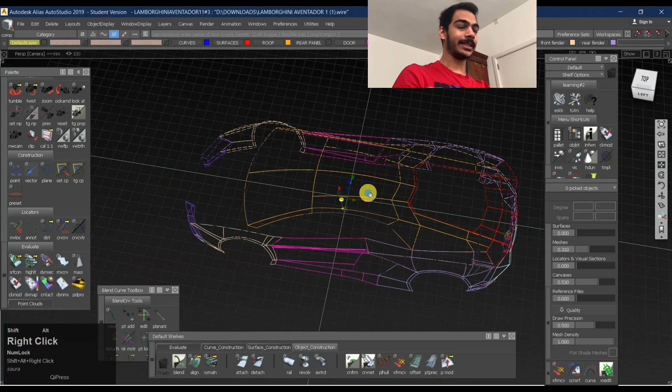And yeah, it's been a long time again, and it takes some time for me to set up everything. I was also having a lot of health issues recently, so that is why I wasn't able to upload any videos. But yeah, now we are back and let's see.

So I thought maybe before continuing the project we are working on, like making the second part of it, I'll take one of the doubts I had from one of my friends. He texted me on Instagram and let me know that he had started with a Lamborghini, which is a pretty good choice if you are starting out with an automotive project. If you take a look at his model over here, it's not a bad start. For someone who is doing it for the first time, it's not a bad start, right?

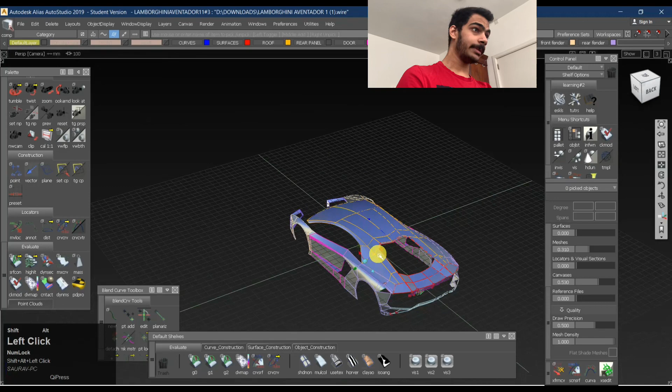You see, he has gotten all the basic shapes right, and he has put them wherever the blueprints are asking him to. If you see over here, he has tried to keep the surfaces as clean as possible. This surface looks pretty good to me. This surface looks pretty good to me as well. Using 4x3 and stuff like that, it's pretty good. The main issues I found here were, if you see over here, on the wheel arch.

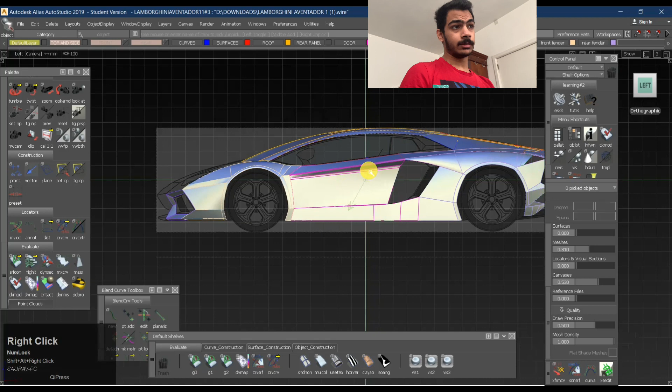Okay, before that we'll also talk about the first thing you need to do when you are starting out with an automotive project. If you see over here, the center of this grid needs to have the wheel on the center of the axis. The main reason is that all cars have different dimensions. There might be a sedan, a hatchback and stuff like that, so they have different sizes. Some might be quite big, some might be very small, like SUVs or sports cars or whatever.

The wheels are of different sizes, and when you start modeling something, you need to have something pretty precise, something which is constant for all of them. Despite having a different size, they need to have something which keeps them similar in one aspect, especially when you are starting to model. I've worked with quite a lot of transport designers who are pretty good at what they do, and they have told me that most of the time when you are modeling something, it's all on the wheels, right? It's all on the wheel.

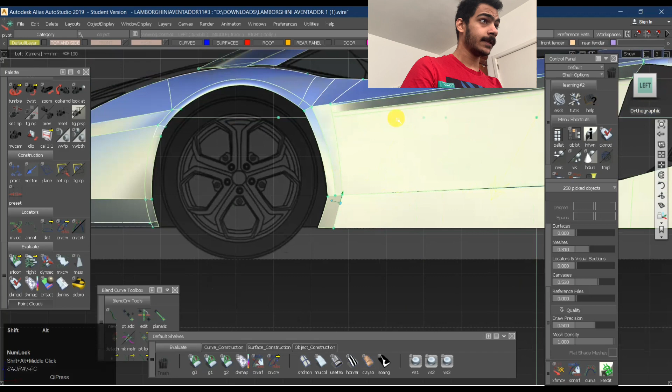The wheelbase over here is usually measured with the number of wheels, right? To give you a small example, I take a circle, place it over here and move it. This is just to show you what is wrong in the model. For now, the shapes look pretty okay. For a concept model, it looks pretty okay, what he has tried to achieve. If you take a look at this, approximately this is the wheel.

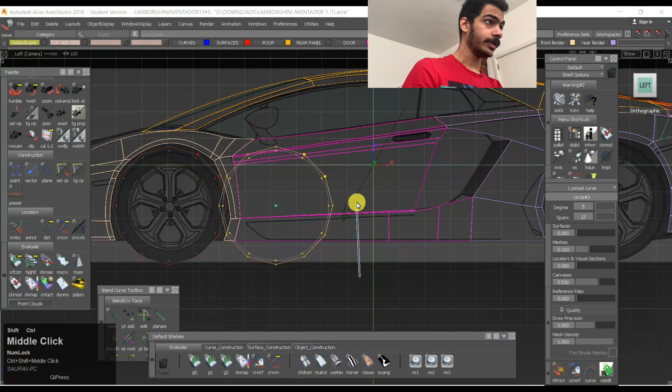I'll just duplicate this one over here, somewhat like this. We go around like this, and we go around like this. And you see there is approximately a three-circle, like a three-wheel wheelbase. So all these measurements are kind of precise, and maybe somewhat over here as well. It's almost like this, because obviously I have messed up the original, but most of the time it's something you need to take care of: there is about three wheels' distance between the wheels on the wheelbase.

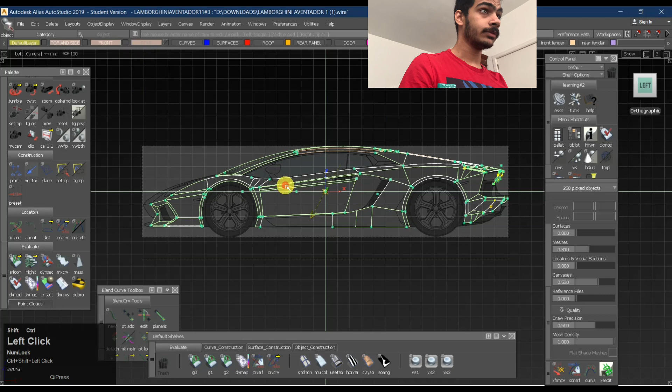And if you take a look at this, the first thing that we are going to do is take all these things. We'll first unite their pivot points. So, uniting their pivot points.

Okay, and delete the construction history because that is messing up with our product here and it's taking some time.

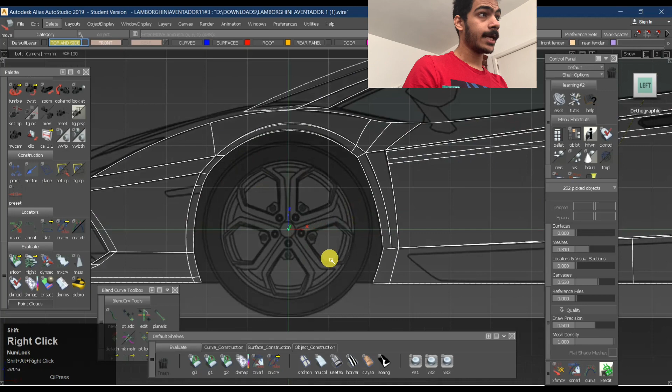Now, let's move the pivot point to the center of the wheel, and move it to the center of the grid. Now we have the front wheel at the center of the axis.

Now what this does is make it easier for us to understand: from here on the positive x-axis we'll have three wheels. So it becomes easier for us to start measuring things out. That's the main thing.

Now, that is the main thing we need to keep in mind - keeping it on the positive side of the axis. Most clay modelers also do the same thing. When they are clay modeling something, they start measuring it out from here. If they want the center from here, they'll start modeling it out from here. So that's the main reason - the axis is the most important part where you start from.

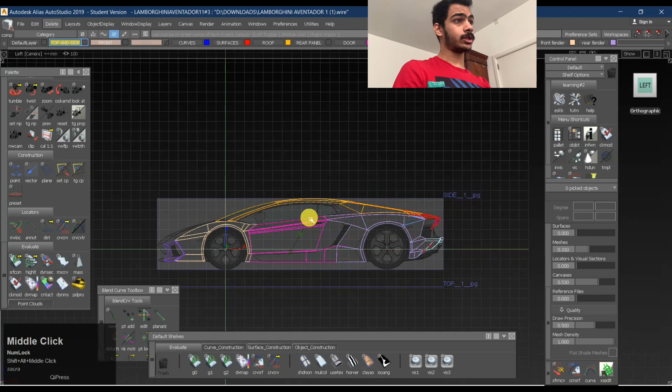Then comes the scale. I don't know what scale he has used right now, but you need to take a look at the scale. You need to have a proper measurement of what the scaling is and how big your car fits in.

Because obviously what happens is when you start with the class A model, most of the time you'll get the clay model and you'll have to just lay the surfaces on top of it. But it is usually recommended that you play with the scale.

Because maybe you work on some higher tolerances or lower tolerances, depending on your scale, the tolerances are going to change eventually. So that's one thing you need to keep in mind as well - keeping the scale precise is one of the most important things.

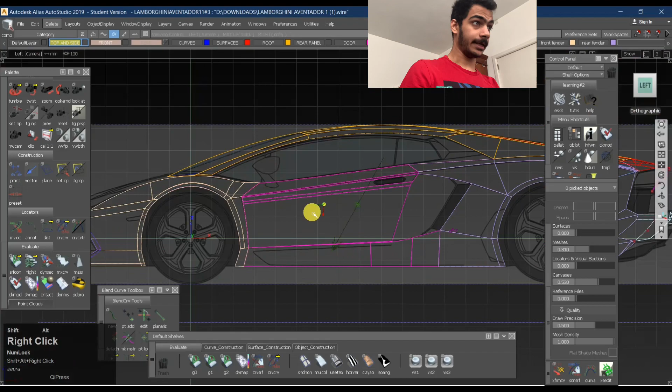So the other thing I saw here was the wheel arch construction. Now I feel he might have first constructed these surfaces, the ones I'm highlighting, and then created the wheel arch over here.

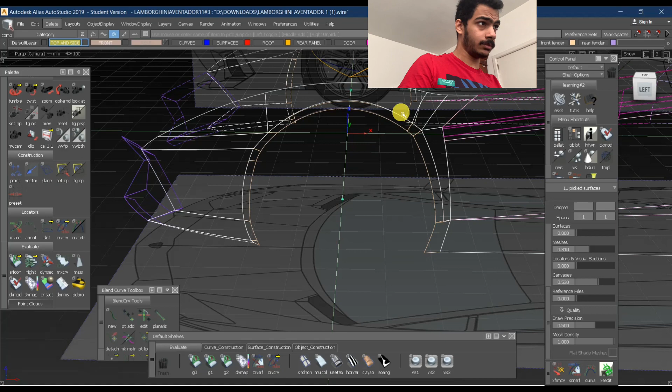Which I would say is not good - it's like a wrong thing to do. First you need to create the wheel arch, and the best thing about this is he has understood that the wheel arch goes in - there's a wheel that shows up and the wheel arch goes a bit in.

So there's a small trick I was taught during one of my lessons. What you do is take a surface, pick a plane, take a surface here, scale it up. There are different methods as well - like you can just skin it, skin a circle.

That's also pretty okay, but since we need something easier for us to change and play with a bit as well - if you see here, it's not a perfect circle for him, it's breaking at a lot of points, and we need a perfect circular wheel arch. So that's what we'll have to take a look at.

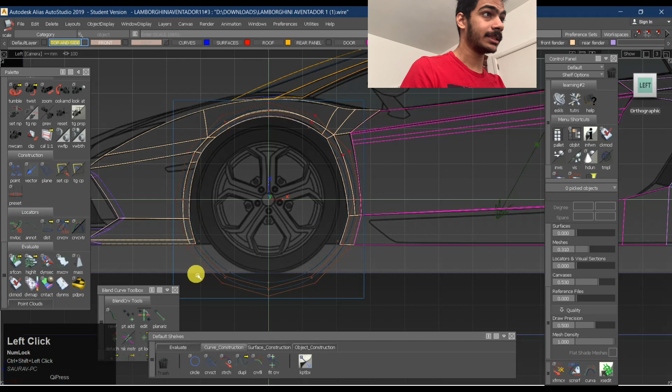Now, I'm just doing it quickly because we don't want to waste a lot of time on this. So this is what we want - you'll just connect a curve if you want it a bit straight. Now I'll try to shift these in a bit, play with this and push them inside, because we want them to be like something like this, and just project the circles over here.

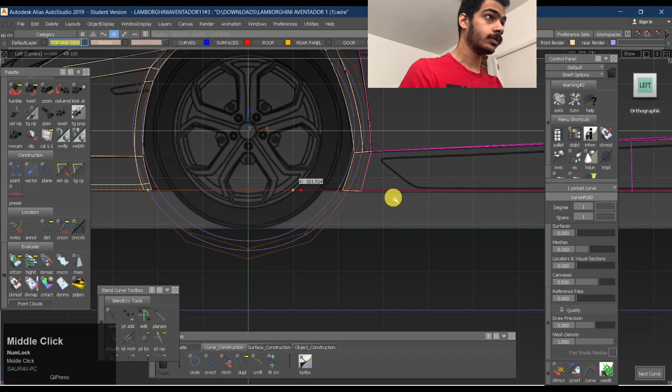And then we'll just trim them out. Keep it and trim it, right? Now we have the history, we have the surfaces over here. We'll just make another curve over here and project it again, and discard this part, right? And now we have a wheel arch which is completely, if you see, we just made this in a couple of minutes, right? We just made it in a couple of minutes and we have something which looks much better, right?

We have a flat plane over here which was just used to create a wheel arch. That's how easy it is. And from that, if you want, you can just maybe play with this. This is my new wheel arch which I have created. So I'll just drag it a bit over here.

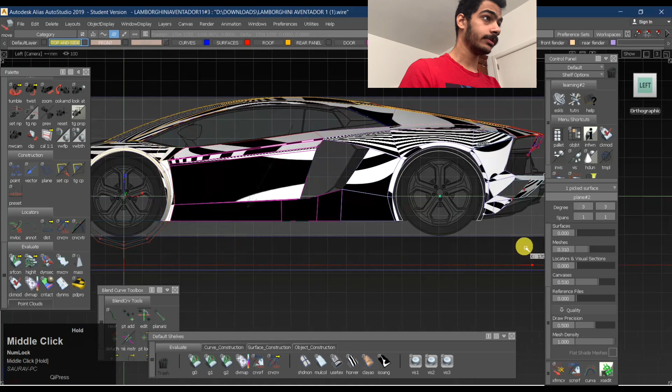Just to show you how it needs to be done, I'll just Control C, Control V. I'll move this over here, maybe approximately somewhere over here where I feel it's pretty okay. And...

If I have a surface in between, this is how usually I like to do it. But if I have a plane in between, I'll just make a non-proportional plane. Maybe make a non-proportional plane again, move it a bit ahead over here like this. And okay, where's my plane? It's somewhere over here. This is how usually I work with automotive stuff, right?

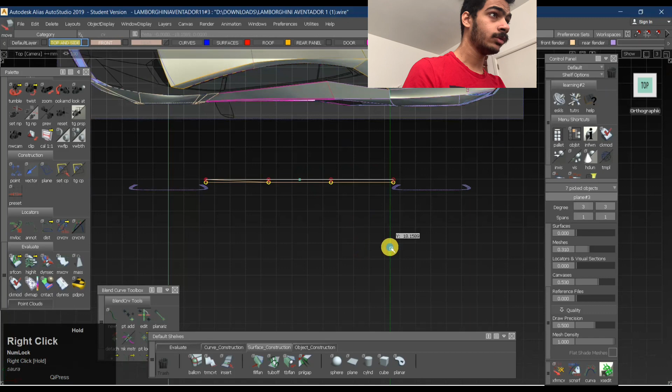So something like this. Now we have a little bit of curvature at the center, so I'll just pick these 2 points over here and bring them a bit out, right? Okay, we have forgotten 1 point over here. And we'll just bring this a bit out, right? So that we have something which is a bit better.

Something like this. And obviously this is not subjected to only this car, right? Your working might differ depending on the car you want to achieve. But this is majorly how you can work around with wheel arch and creating a perfect, good looking wheel arch, right?

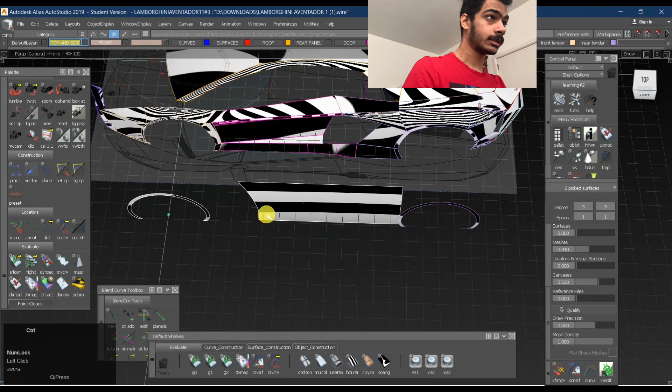So if you just scale it maybe, and just scale it so that you have somewhere from here maybe, and project it, and then trim it. Oh, we'll just keep that part because we need that. And over here we'll just hide and just freeform blend between these two.

Okay, I don't know what the issue is. Maybe I'll just untrim and trim it again. Yeah, maybe trimming it again might work. No. What we'll do is we'll try to detach it maybe. Okay, yeah, because it's a plane, obviously. That's not going to work, right?

So we'll just freeform blend it. But I doubt if it's gonna work. So maybe a square would also work, right?

And we'll keep it 3 by 3 degrees because we just need G2 from one side, right? And object align G2 from here, right? And G2 from here. But now we know that, okay, maybe we cannot do G2 because it's following this path. So we'll use vector, right? And vector goes normally with it. So we have something like this, right?

And then we'll just trim this part again. We don't need this, and then just square it. Oh, okay. Maybe there's another issue over here.

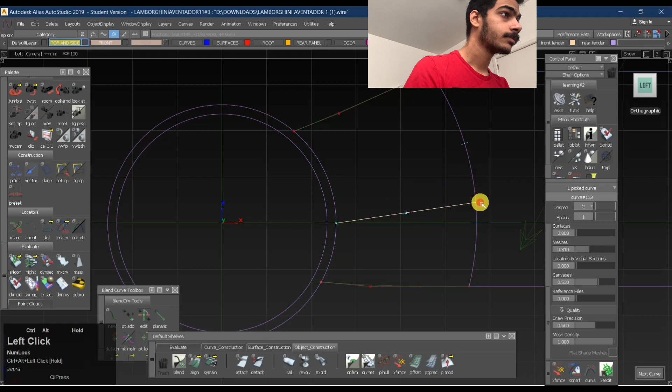So obviously most of the time when I am doing it, it's okay to use a plane. I usually go around and play with the skin. You can also skin it, which will be much easier if you want to achieve something like this. But this has a history, right? So you can just move around and play with the plane and stuff like that. With the curve, it becomes a bit tricky.

So that's also one more thing which you need to keep in mind, right? But this is, again, there are multiple solutions to this. However you want and however you can get your surfaces clean. Okay, so we have something, there's an issue over here maybe.

What we can do is, if we see over here, maybe there's a point where our circle is joining, right? So maybe we can just rotate it, not like this, maybe somewhere over like this, right? That we have something like this.

And then maybe around 90 degrees, yeah, that would work. And then trim it. Yeah, now I think it should work.

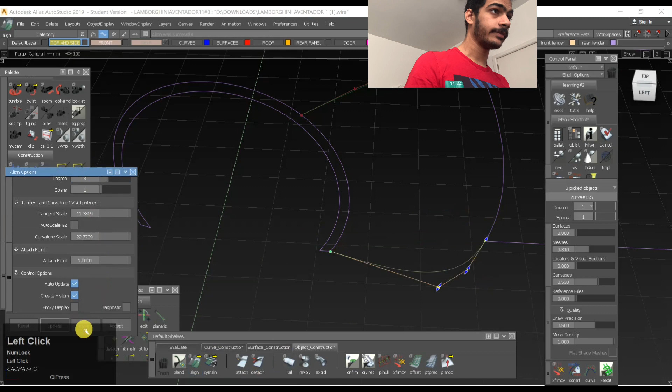Maybe, where's revert? We'll just revert this. Okay, we have revert over here. And we'll align it over here, right? Now we'll just square this thing.

1, 2, 3. Okay, maybe there's align, now we'll have it, right?

Yeah, so these are some of the changes you need to do. Again, I don't know what happened over here. Maybe we again, this is one thing which happened.

Now I'm just going to attach it for now. I won't be paying a lot of attention to this. I'll just be attaching this and I'll just square it around, right? 2, 3 and 4. These are some of the things which create some of the problems in Alias as well. So yeah.

And maybe 4 degrees might work, 5 and 8, but we don't need 8, right? What we can do is we can create a 3 by 5 kind of a surface. We can just detach it in the center, and then realign it.

We can detach it in the center, we can realign it, maybe G2 over here. We'll see the continuity check, edge align. We'll keep the skew over here. We'll try to keep it positional align, and that positional influence is okay. With G0 over here, it's perfect.

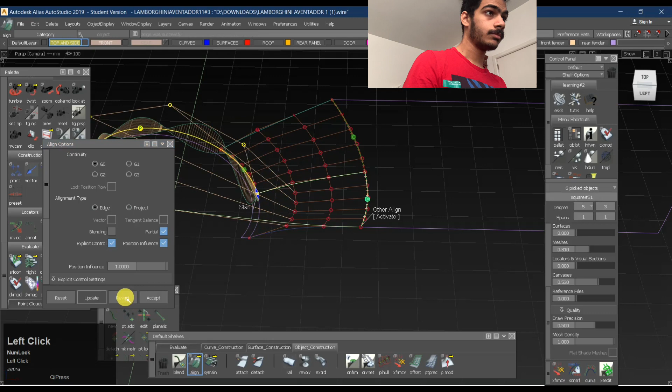Maybe over here we'll have an issue, maybe. Yeah, it's okay, it's perfect. And something like this, right?

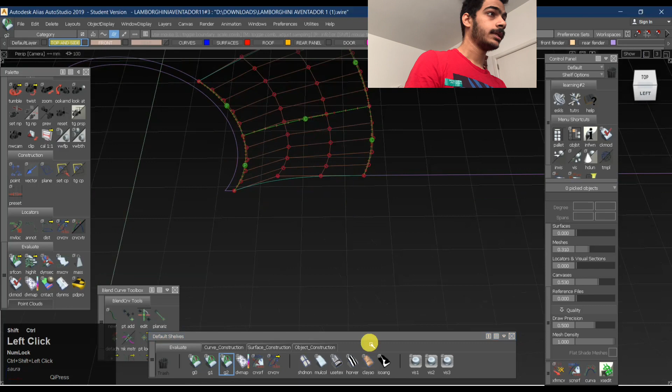So you see how your curvature is flowing right now? Something like this, and not that bad for the first time you're working, right? Not the worst one, you'll see. It's pretty okay for now.

The curvature looks pretty okay. The surfaces flow pretty smoothly over here, right? So this is what it is. We have pretty big surfaces over here, which are 5 by 3, which looks pretty good. So this is one thing which you need to keep in mind, that constructing is always the same.

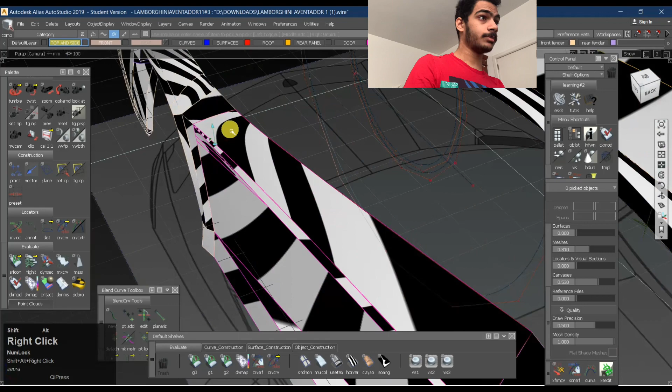Now, obviously this wouldn't go with the Aventador we have here, because it's a different model altogether, but the working is kind of the same. In fact, this one is much easier because it's going straight and then it's just a flat panel over here, right?

And one more thing, if you see over here, lots of degrees over here, you can just make it with 2 by 2. Why not? Yeah, see? And just have a positive crown. Just have a little bit of crown over here. Have some straightness to the surfaces. The surfaces should look pretty as well, right? That's the main motive. Something like this.

And just by tweaking a couple of millimeters of the CVs, we are able to achieve something which is pretty good. We'll take this and...

Something like this. Obviously over here, if you can see, this thing can give you a better idea of how your curvature is, right? Because this thing can tell you, okay, this thing is not right, or this thing is not looking better. Maybe something like this.

It is better if your reflections flow in a straight line. It's good to look at, and whatever is good to look at, it's much better.

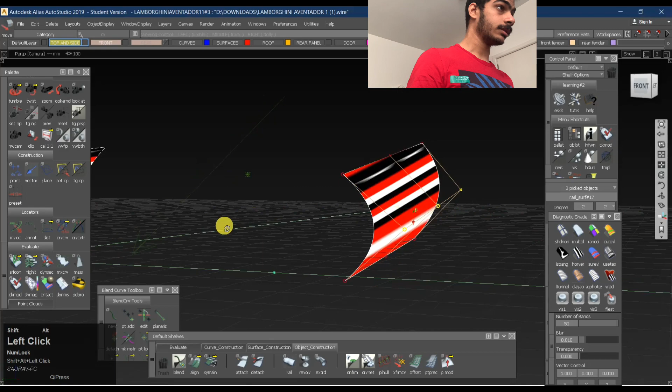Yeah, so something like this. Obviously, if we try to maybe bring it a bit more out, you see how it's changing. It increases the curvature, and it's completely straight. That's the best thing about it. It's completely straight. We'll just have a little bit of crown, because in automotive, one more thing you need to...

Keep in mind is a surface is never flat. Never, right? It might have a little bit of crown, especially very little also, it's okay. Even if it's very little visible, but there is some kind of a crown. And just by looking at this surface now, we see that it's completely in good shape, right? Now, just by tweaking the surface a little bit, I didn't do a lot, I just tweaked it a little bit, and here we are, right?

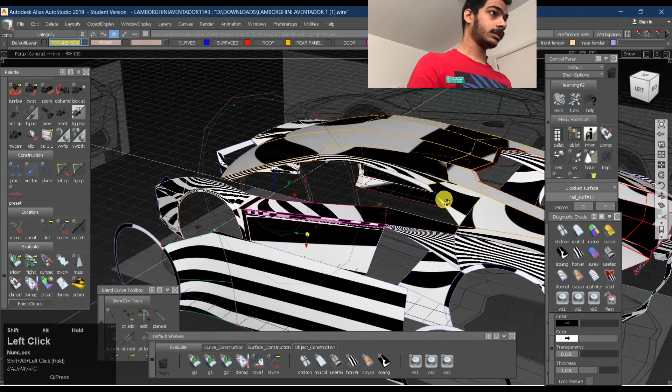So he's going on the right track. I would just say that reducing some of the degrees and playing around with some of the CVs and stuff like that would make things pretty good.

Here I think one thing which he has missed is the continuity over here, right? As you can clearly see, there's no tangency in between. Even though there's position, there's no tangency. There is position over here, yeah, and there is position over here, which is a great thing.

Again, not a lot of degrees required here, not 4 by 3. I would just go on with 2 by 2 and just try to increase it later. So how are you going to work around this, right? This is one of the parts where, when you are working on a roof, it is most importantly like you need to create a whole roof altogether. But here our continuity is going to break here most of the time, right?

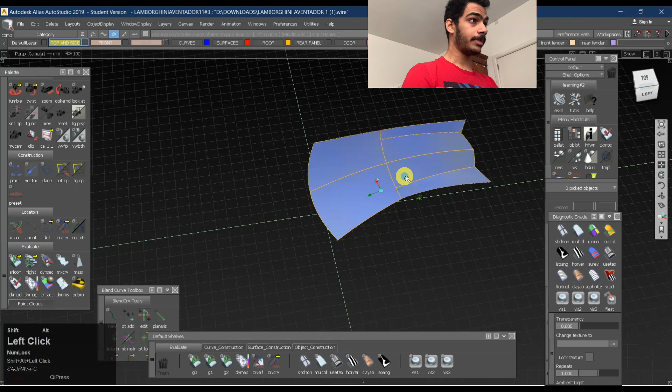It's going to break here most of the time because this is G0 in the center and this is G2. It's very difficult to have that continuity maintained and have that little bump over here. So maybe, if you want, you can just fillet it so that you get a small blend in between. That's not a big deal, as long as you are getting your surfaces clean and as close as possible, it's not a big deal.

So what we'll do is we'll just duplicate it. For the symmetry thing, I have one more tip which you all can use, and that is making one single surface across the center. So you just duplicate the curves - this one, that one, the symmetry one, this, and this. I have all the curves selected and I'll just attach this in the center. I'll attach this in the center, and now I can directly reduce the degrees so that I get a similar shape.

But I can also use one more tool which is pretty good, which I think is one of the best tools - the fit curve. If you have a lot of degrees and you want to just reduce it and want the software to do most of the work, then you have fit curve. It's there in curve edit, fit curve.

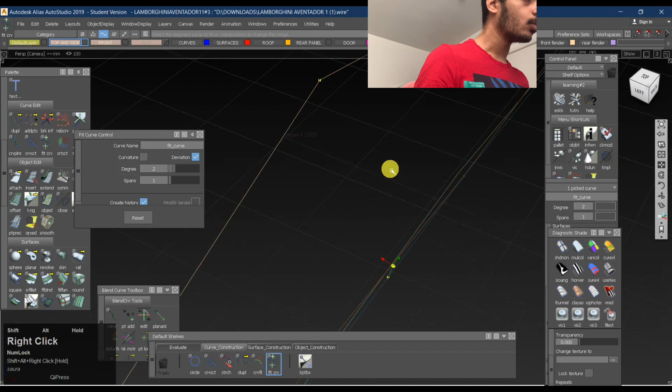So you just select the curve with multiple spans and multiple degrees. You can take it over here and you see there's a degree 2, and it will also show you the deviation, which right now is 1.25, which is quite a lot. I would say 1 millimeter is quite a lot if you ask me, but it's okay. You can even manually try to bring it down a bit. Yeah, see, it's going down by 1 millimeter. It just went down a bit.

So it's okay, we won't pay a lot of attention to this. We also have to keep in mind that we have to keep the design intent correct, so maybe his curves might not be very precise. You usually get around 1 millimeter kind of deviation allowance in working, so that's not a big deal, as long as you're also working with a blueprint, it's okay. It's perfectly fine to use this fit curve. Eventually your design intent should look good and your surfaces should look clean, so using lesser degrees and achieving the highest quality result is the main thing we need to target.

Okay, somewhat here as well, we are just deviating by 1mm, so I'll just take this, it's okay. We see this over here and we compare the curvature comb in between these two curves, we'll see how the curvature comb is. Let's take a look at the curvature comb, and we'll just use the U and increase the comb scale, somewhat like this. This looks pretty okay to me.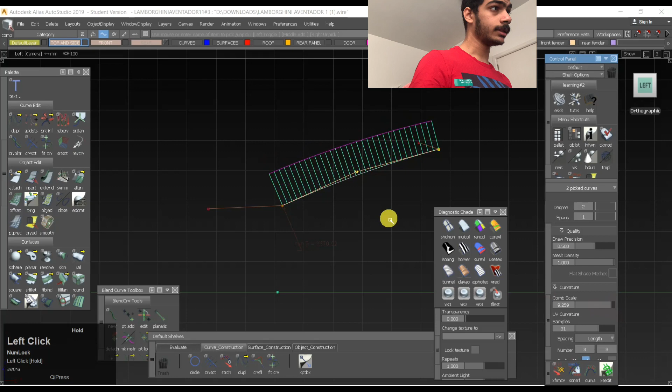Oh, sorry for the background noise, there are a lot of vehicles going on.

So I'll just use a square - 1, 2, 3 and 4, and it's 2 by 2. That is perfectly what I want. If you see over here, the CV layout looks pretty good, pretty promising. It looks pretty convincing as well, the surfaces look pretty convincing.

Obviously, we can just play around a little bit with the CVs and maybe try to get them in the correct order. Use this and place it in the Y direction. And just by sliding the center one, we'll lose the history for sure, but just by sliding the center one, we can try to get something which is a bit more clean, something like this.

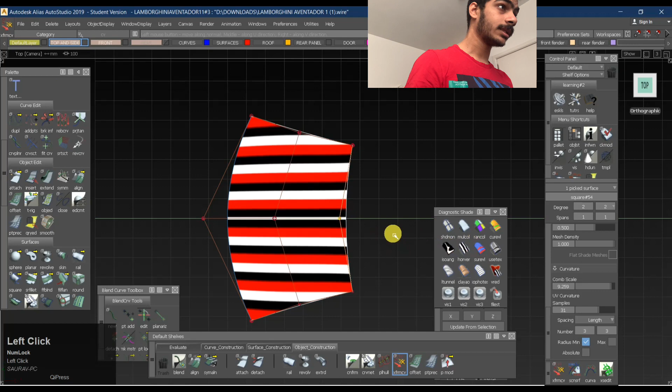And we can even fiddle with this one a bit, so that we have something - we're trying to make it a bit flat so that we have some kind of shape, and we'll also maybe increase this a bit as well. So we'll keep it to 25, we don't need those many.

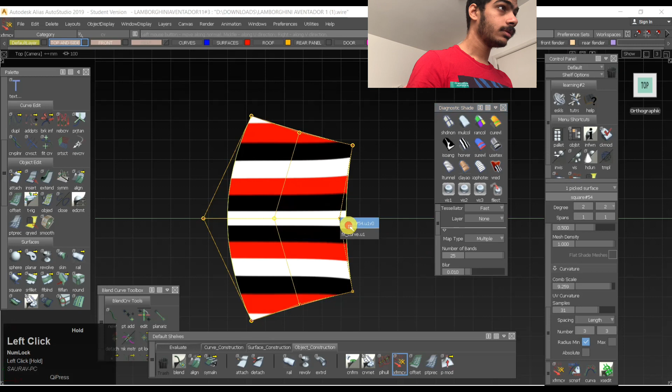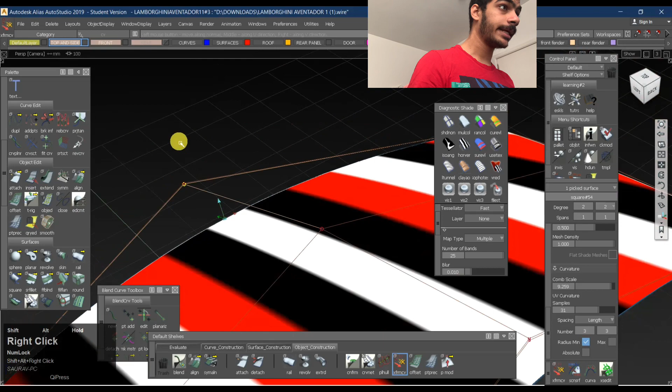Obviously, as you can see, I have deviated quite a lot. So this much. Simultaneously, I cannot just deviate a lot from where I want. Some of the things are going to be like that no matter how I want it to be. So I just need to find some solution which is just in between, where I can just drop it a little bit and maybe bring it a little bit up. So for now, I think it's okay.

The reflections look kind of pretty good, I think. These look straight, and that is what we want. We want the reflections to be straight, clean. We have the continuity in between because this is a single surface after all. Oh, this is his surface maybe. We'll delete this one, and we don't need to check the continuity because it's a single surface, right? So I think this is a pretty good surface. Now we'll just duplicate this as well. We'll do the same thing.

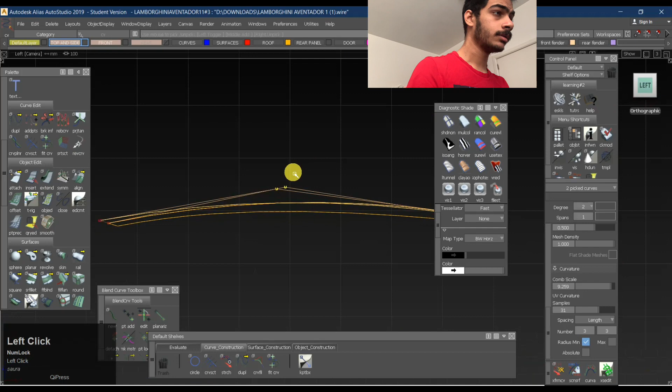Now, if you see in this one, there's one thing which is quite evident, right? Maybe I'll just template this one. I'll make a new layer and put this one in it and hide it. Now, if you clearly see over here, it's quite evident that the curvature is not flowing equally. As you can see over here, I think I should just increase my draw precision. We'll keep it to 1. Yeah, now it's cleaner.

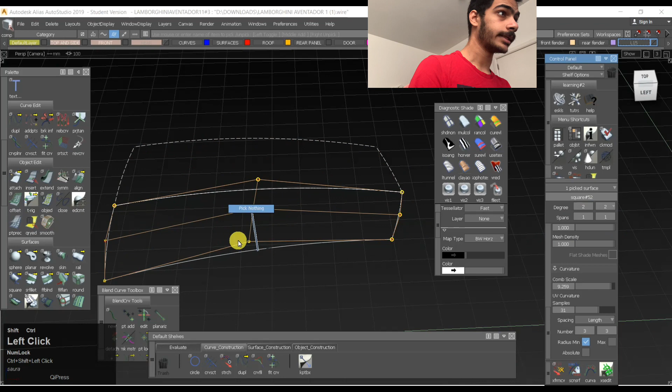So if you see over here, this is a bit curved over here, then flattens on the top and becomes like this again. There are a lot of CVs again, which I don't like. So I'll just keep it 2 by 2, right? Pick this CV, and I'll just try to bring it down a bit. And just notice the reflection first and why I changed it. So something like this. Not happy with it, but okay.

And now we'll just bring this one down. Because we want the curvature to be the same, somewhat just eyeballing it, so we get something closer. And this one as well. So we'll just bring this one a bit down. Is this the same one? No, this is not the same one. This is the one. Square and bring it a bit down.

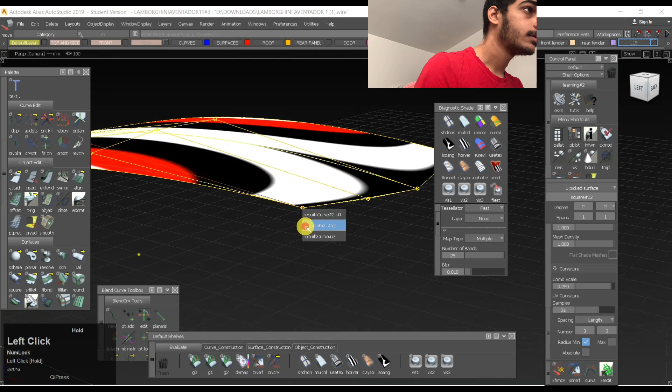There's also a visual reference we have, right? The white line over here. The white line is also a pretty good reference for us for how much we should move it down. And here we are. Just by moving it a bit, you have gotten something which is pretty convincing for now, which looks like maybe this is going in the right way. Then we can just move around, play with this a bit. Maybe move it. We'll delete the curves first.

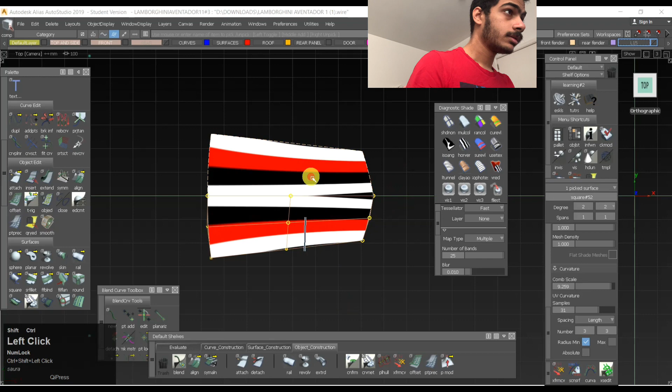And the reflection is still pretty good, I would say. You can just make those minor tweaks just to get it as clean as possible. The sharpness is still there and looks pretty good over here. And we'll try to realign it with this one. Even if we are able to align it positionally, that's also perfect. And we have the same reflections, kind of. You can still make some minute changes and we'll get there, like maybe playing around with this a bit.

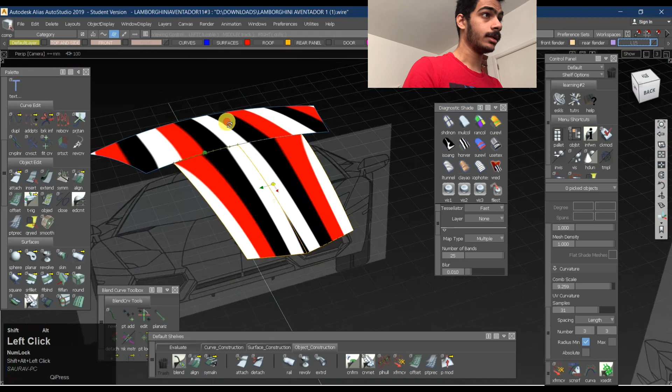Because obviously it needs to readjust with this as well, so it needs to keep that curvature over there. So you need to now start playing with this one in case you want, moving this one a bit up and moving this one a bit up. So just like this, you need to start working around and figuring out the best solution to achieving good quality surfaces as well as keeping the reflections clean, taking multiple things into consideration.

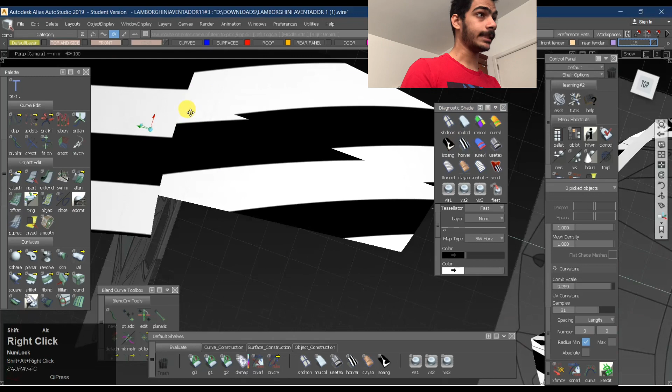Now if you take a look at this one and this one, you'll clearly see a distinction, right? On these surfaces the reflections look quite harmonious, whereas here it looks quite disturbed. So that is what we want. We need it clean, and you'll see that we have G0 over here as well. Now even putting fillets is going to be quite interesting. For the roof we'll remove the symmetry. We'll just edit, duplicate and mirror for this one.

Maybe we'll put all these in the new layer, right? Assign. And let this have the symmetry for now so that we can see how it works as well. Make a small fillet, maybe 15 or something. This is just for showing right now. We do not need to make any kind of a fillet or something like that, right? We don't need any kind of a fillet.

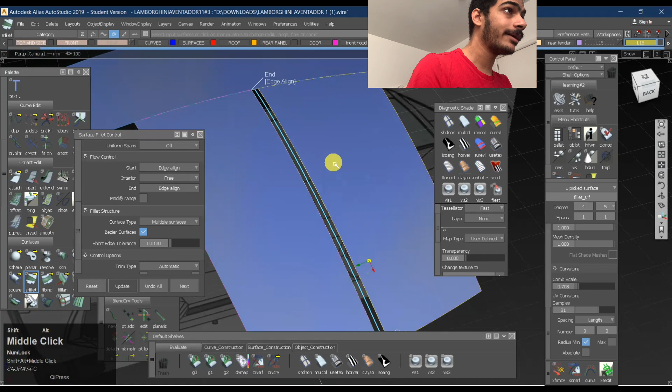Yeah. So we have something like this, right? And here, as you can see, I have hardly used anything and I have gotten a 4 by 5 degree with a pretty good reflection over here. As you can see, there's a bit of a fillet in between which gives you a kind of a sharp edge but also very smooth.

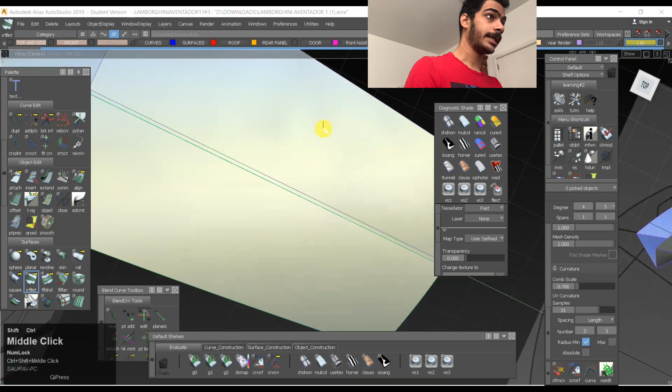So you can again play with it, maybe make it smaller, make it big, maybe make it 7. I think 7 might be good as well, depending on how you want your fillet to be. Obviously, as you can see, a pretty good sharp line flowing in as well. If you take a look at the reference, you see how it's going very sharp and then it's flowing. Obviously, you can do it over here as well.

You can try to make it a bit sharper by just bringing those CVs down and then maybe bringing the center of this windshield down. And those are all the things which you need to start working on later on, right? So these are some of the tricks that are usually pretty good to know and start working on as well, right?

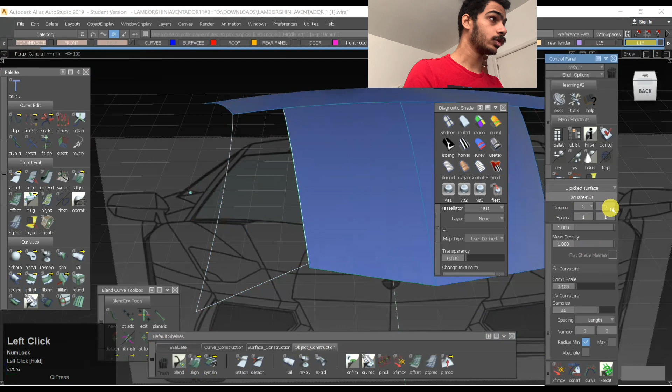Again, now we have this one. I had a layer over here. And now I know I want alignment over here. I first need to reduce the CVs. I'll just keep it 2 by 2. I don't need a lot of CVs. I'll align this one over here with G0, right? I'll align this one, obviously, over here. And it looks pretty okay for me right now.

And let's see how the reflection is. Not good. Not good. I'm not very happy with the reflection. I don't like the twisting a lot. So what I'm going to do is, again, bring this one a bit down. Bring this one a bit down as well. Let's see what effect is happening, right? Yeah, something like this might work.

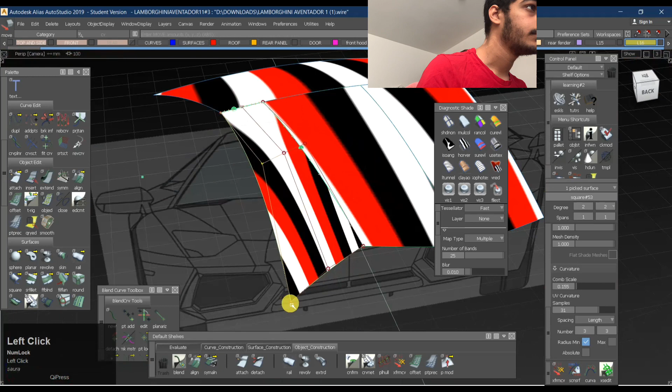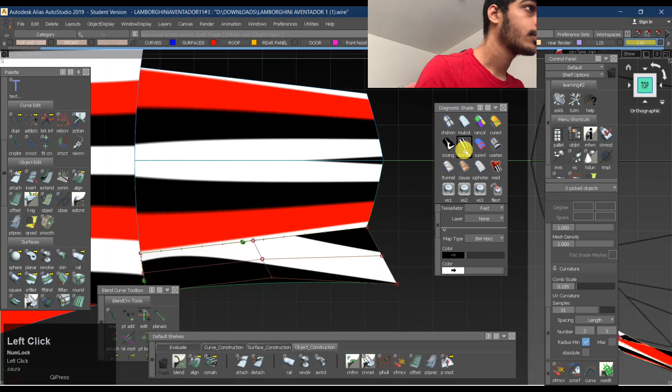We try to keep it as straight as possible, obviously. But again, we just need to play around with these, right? Just need to see how our CVs are and how the degrees are and stuff like that. Again, sometimes it's important for us to just play around with this and see if we are going in the right direction. Something like this might work, right?

You also need to see the distances. One more thing is, the cleaner your CVs are, the better your results will be. So if you see over here, this thing and this thing, there needs to be a transition which is just in between this and this, which is somewhere over here as well. So that is how you can see what is the best way to get the CVs correct and the best way to get the surfaces right and stuff like that.

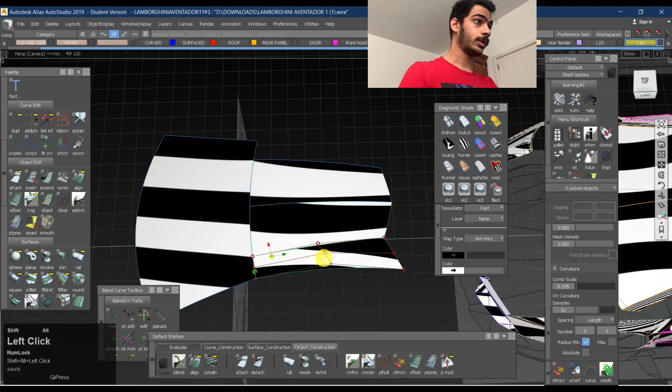If we take a look over here, let's take a look at G0 continuity check. We have the G0 over here. Do we need, yeah, we need a little bit of positional influence over here. Just, yeah, something like this might work. Not very happy with this part. Because these are some fine tune adjustments that you need to do, right?

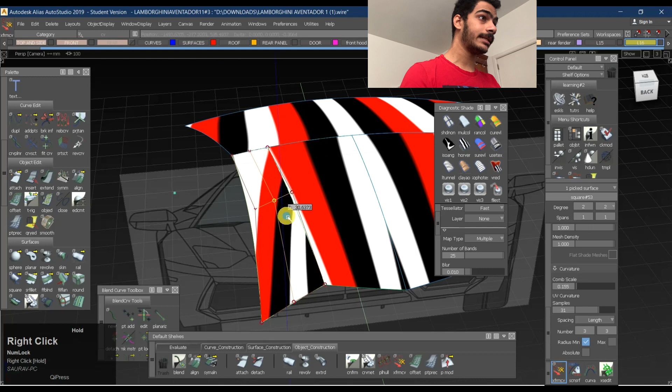And again, the reason why we are just moving these two CVs is because we know that this CV line is completely fixed. This is completely fixed because we cannot move that. The only thing we can move is the boundaries, right? We can just move the boundaries, play around with the boundaries to make it as clean as possible, which is a good thing as well as a bad thing, because now we have fewer CVs to worry about to get the perfect lines and stuff like that.

Right? This looks pretty good. I think this looks good. Yep. So something like this. And now we have some pretty good lines over here, if you see. Right? And we just make some small fillets. So maybe 7.5 might work, right?

Okay. So one more thing, when you are adding fillets, this is the direction of the fillet. Now your fillet is going down, but we need it to be up, right? Like this, right? It needs to be like this. So we'll bring both the arrows up. Now sometimes the fillet command doesn't work because it doesn't know the general direction, but now we'll just flip these two directions and here we are.

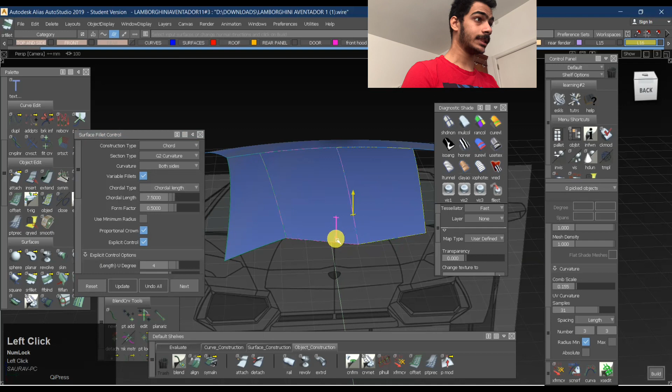We'll just edge align this fillet and edge align this fillet. Since both of those were positional aligned, that would be positional align as well, I presume. So let's check that out as well. G0, oh, it isn't. Is it? Is this one? Yeah, this one is. And this one? Okay, this one isn't. I don't know why this one is and this one isn't. That shouldn't happen, right? Maybe there's an issue over here.

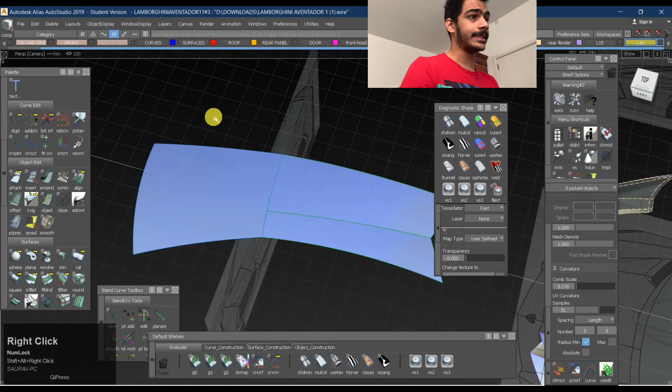Is there an issue with the surface over here? The surface looks okay to me. I don't know what's wrong. Did we by chance move it somewhere? Yeah, that might be an issue as well. That could be an issue. Right? Okay, we don't need to worry about that. Yeah, so one thing which I do is once I construct everything, I just extend it back. Now I know that even if I bring it ahead, it's not going to. So that is one good trick that you can do, right?

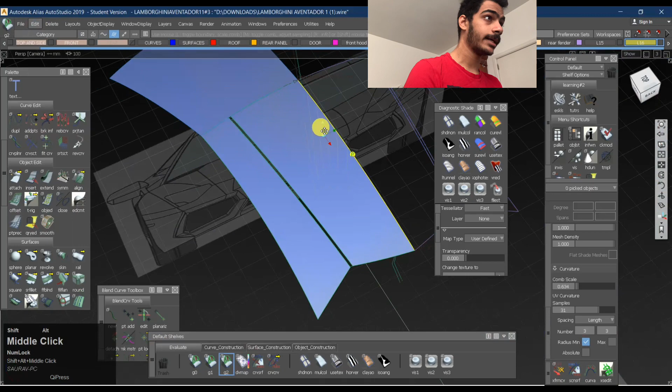And even if we just edit, duplicate and mirror, we get something like this. Hopefully we have G2 in the center. Oh, we don't have a positional alignment over here. Yeah. That might be because of the CVs over here. So obviously our CVs are not connecting. And hopefully, why aren't we getting G2? These are some of the things which we need to keep in mind, right?

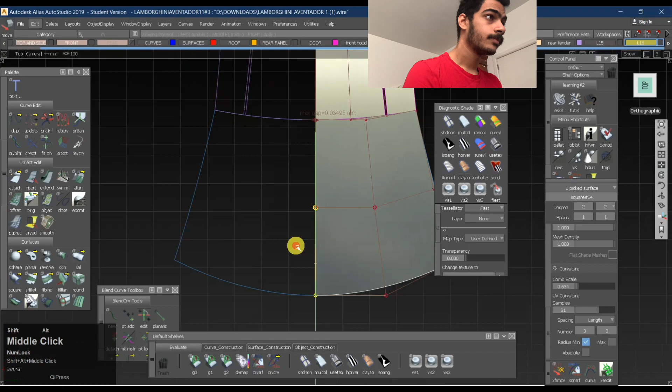Because our surfaces are clean, everything is clean. But I think there's some issue, there's just a minute gap or something which is remaining behind, which I think is the issue.

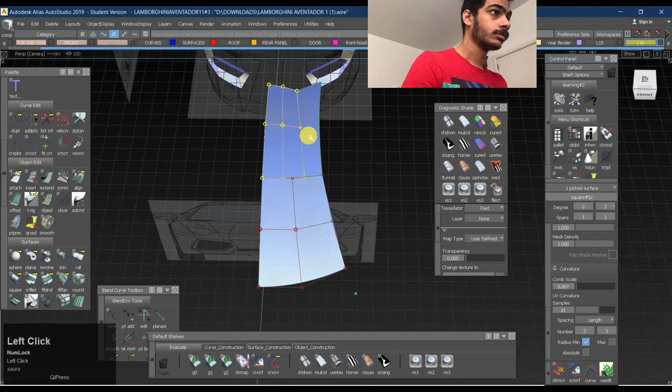Okay, and G0, okay, and G2 over here, G2 over here, and we don't have G2 over here obviously because we want it to be G0, right? Just G0. Yeah, there we have it. Something which looks pretty good, something that looks pretty convincing. We just add the surface fillets over here, and we want something which is going up like this, edge align, something like this. And where is it? The model is over here,

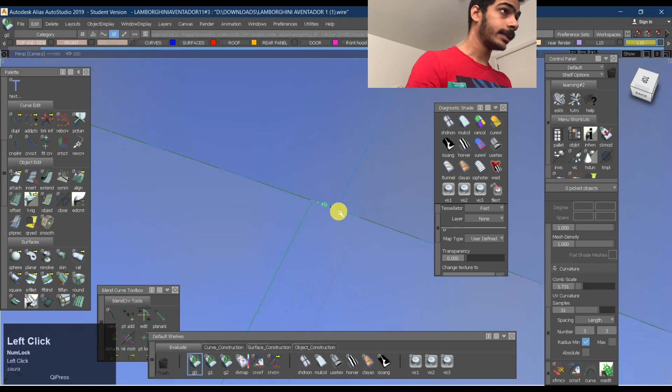and we have G0 over here. Okay, we have G0 over here. We should have G0 over here as well. We have that, right? So maybe there was some issue over there, but now we have fixed that. And something like this, edge align over here as well. Do we have G0 over here? Yeah, so we'll have G0 over here as well. Yeah.

So here we have it, the top panel kind of done. As you can see, we have something like this. We have something which is flowing eventually. So you see over here, it's still going down like this, but we still have something which is flowing very nicely, very nicely. I'm quite happy with this. Obviously you can take it one step ahead as well anytime. That's not a question to ask, but again, you get these kind of surfaces and you're pretty happy with this, right?

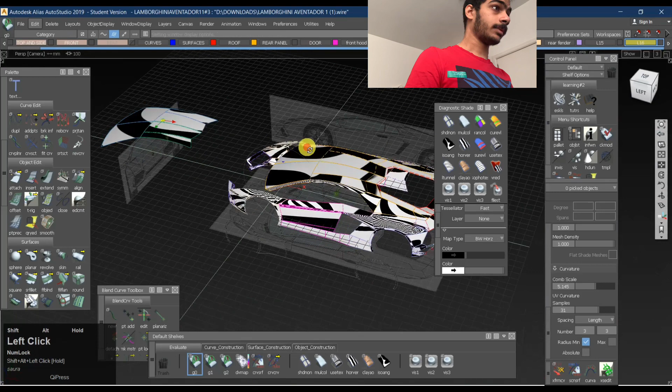So something like this as well, the curvature over here and these things. I hope it is informative for you. Same over here, if you see it's 4/3, we don't need 4/3 degrees. We just use 2/2 all the way over here, right? We just use 2/2 and we were able to achieve quite good quality surfaces, right? So that is what we want. We want good quality surfaces with just very minute, like kind of things over here. So that's the topic.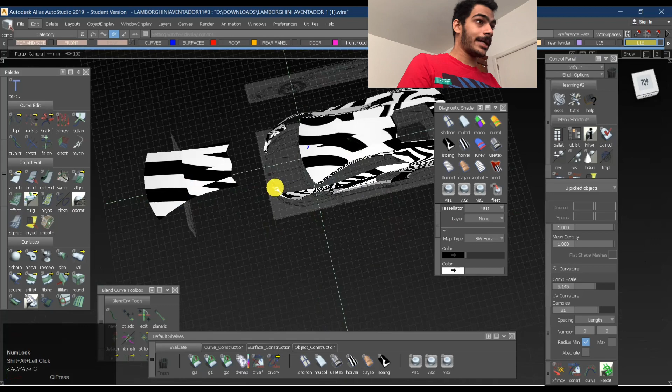And as you know, Neil, I hope he might have understood what doubts he had. Most probably he just wanted to know if this model was correct and what he has to change. One more doubt he had was over here as well, right? So this thing is also quite similar, I would say. Like, use the least number of degrees, start with the wheel arch first, and then you will get this surface.

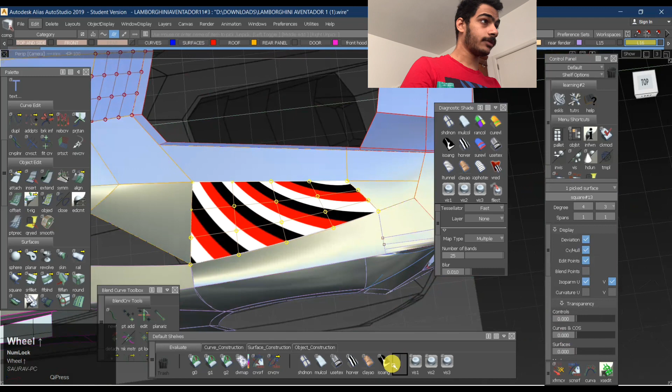Start building the roof first. Once you finish this part, I think it's going pretty well for him. Yeah, this reflection looks okay. This reflection looks good. Not over here. As you can see, if I am moving it over here, it's changing the direction. If you see, you'll have to see it from almost all the directions to get a better idea of how your reflections are flowing, right?

So X, Z, and you see there's a problem over here. There seems to be a problem over here. So that's the thing, right? So just by reducing the degrees, you can do a lot of things. I don't think you need to use so many degrees. Only if you are playing with some kind of fillets or some kind of a transition or an alignment, then maybe if you need to. We were quite lucky to get it in 2x2 and get it positionally aligned and then get a fillet which was not just one small blend over here.

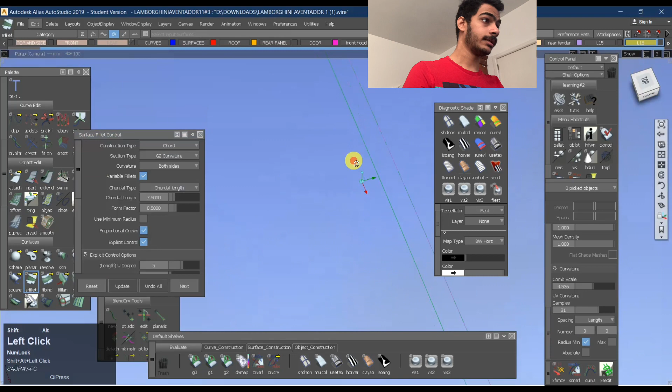Okay, if you maybe increase it to 5x5, I think it should work. Yeah, see, so just a 5x5 small fillet, and there we have it. So we were quite lucky in this place as well. Also, if your primary surfaces are good, your secondary surfaces are bound to look good. And we'll also take a look at this as well. So surface fillet, and edge align, and edge align over here as well, and 5. Yeah, and let's see, something like this.

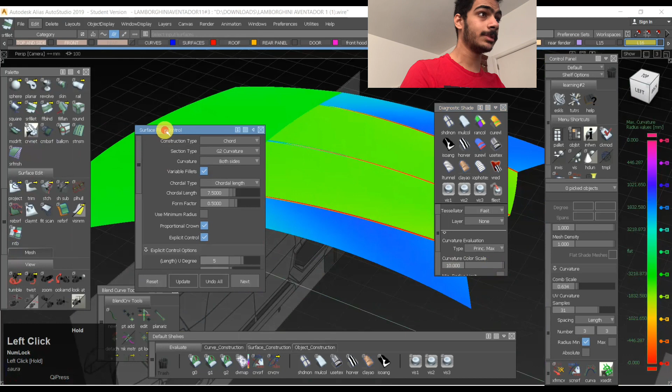Okay, and curvature scale. Yeah, so if you see over here, there's a small problem right here. Maybe that would be with the normals over here. We'll just try to switch the normals. Yeah, we had a small issue with the normals, and we switched it. If you see his curvature now, we'll take a look at the curvatures in between, the difference in between. And you see over here how uneven it is. It's quite uneven. I'll just ramp it up to maybe 15 and we'll be able to see it clearly.

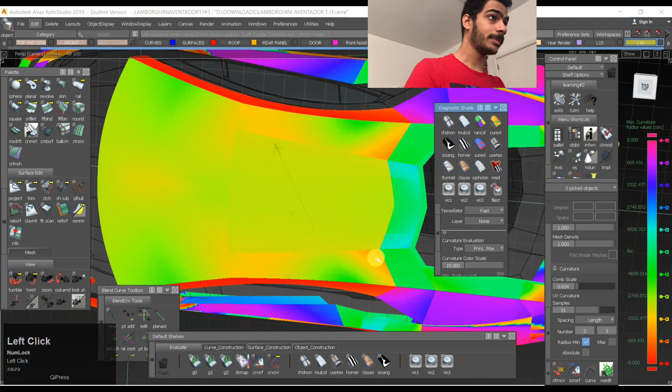Yeah, and if we see over here, it goes quite smoothly. We know that there's a point over here. Maybe we could have played a bit around over here as well, but it's moving gradually. Here it's a bit of a haywire where we cannot see what's going on. And yeah, so that's how it is. It can be as simple as just having 2 degrees and playing along it all over. You see, it cannot even find a sharp shape over here.

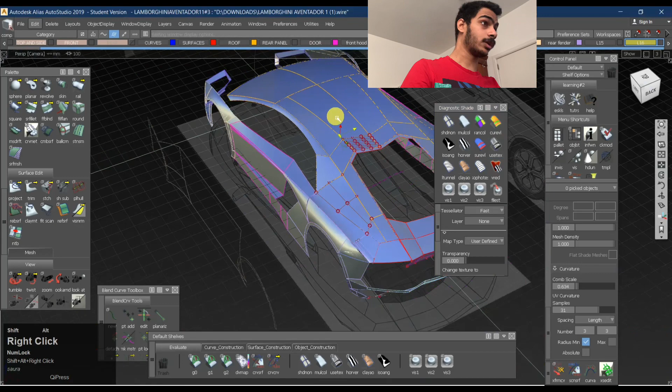So these are some of the mistakes which he has done, but it's pretty good from a starting point of view, because he has gotten all the shapes right, which is quite good. This is if you want to ramp up your surfacing to another level, right? If you want to get it to some good level, then obviously this is something which you can take a look at. Then you also take a look at the curvature comb and stuff like that, which is also very useful. So you just switch on the curvature comb, and that is also one kind of an analysis.

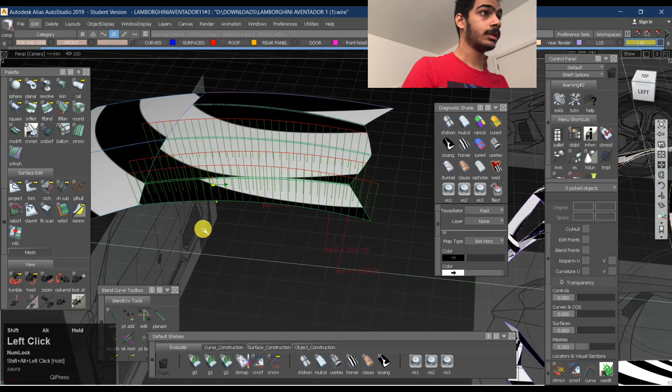Now we might go wrong here, and our surfaces might not be evaluated as good ones if we take a look at the curvature comb right now. Let's see. Yeah, for this one, maybe the U and V has changed, so we'll just switch it over here. Yeah, and this looks pretty decent as well. Maybe this could have a bit of curvature ramped up over here, so you get a bit of an acceleration. You can just slide the CVs on the top, so you get a good acceleration over here. If you see, we just increase the U and V. Yeah, this looks pretty okay as well.

In general, if you don't have a G0 over here, you have something which is like this, a bit accelerating.

In case I show you right now what it is, I don't know if it's gonna work because there's a small fillet over here, but just for representation, I might be able to show you maybe around 50 or something, or maybe 100. Let's take it up a bit. Now we'll keep it to 50 for now, just for showing how it's looking.

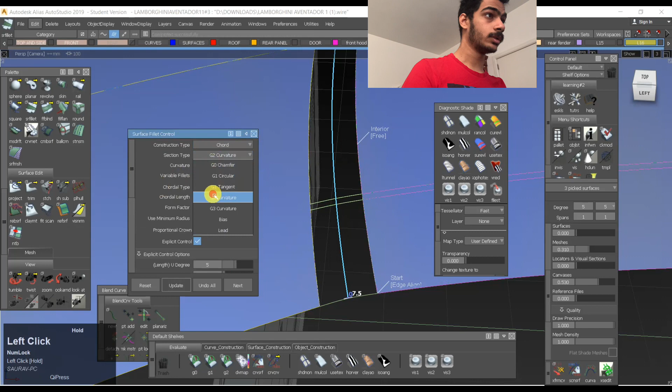And G2 curvature, right? Right now we see there's a lot of deviation over here, which shouldn't happen. It should go very smoothly, but we haven't taken into account those things.

So I'll just show you how it looks like, just selecting these 3 and maybe making a curvature over here and increasing the curvature comb at the top. And this thing needs to go over here, and something like this. Obviously this fillet is not properly aligned because it's G2.

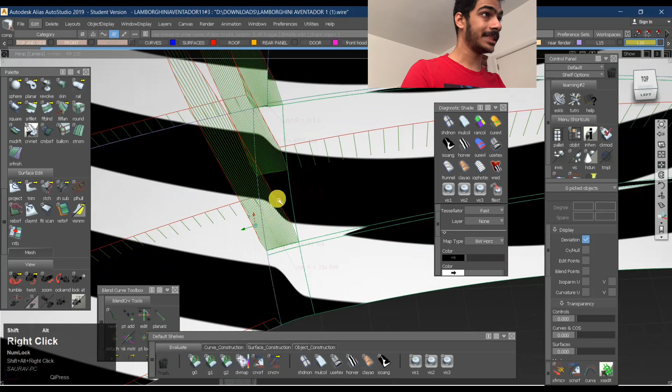I won't say that it's not G2, but for G2 it's just like breaking in over here, right? We need a smooth flow over here, so we'll just try to shift the CV so that we get a fluid flow in between.

So those things we need to keep in mind, but those are some of the things which come a bit late as well. Like for a model like this, it's pretty good, I would say.

I would also think that maybe having just G0 over here is fine, because this is a windshield, right? So this is anyways gonna break. This is a windshield which we have created. So this might also be pretty okay for an elementary level where you have a clay model and you think, okay, there's a break anyways over here.

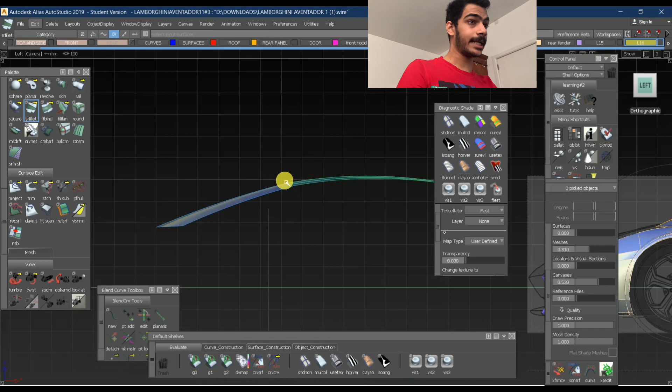Do I need to make a surface over here? Maybe no, right? So some people just make the whole body and then maybe make the windshield and stuff like that later on, because they want to have a different part altogether. In class A, all the parts are going to be different. But in a proper concept model, no one cares. It's pretty good to have one single surface all around and just break it apart and then use different trim convert commands, or maybe trim divide or stuff like that.

So most of the time you usually build them separately when you're modeling in class A, right?

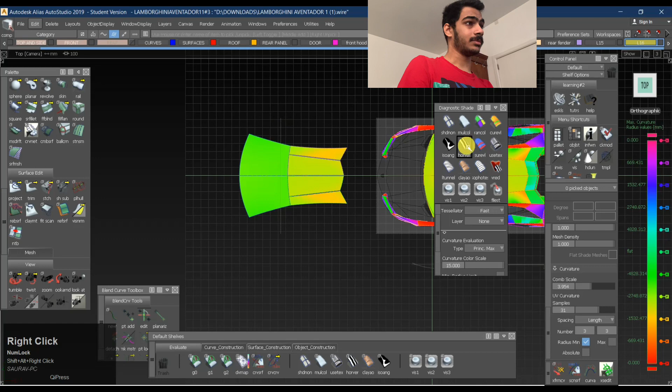So yeah, this is something. I hope you liked it and I hope this was useful for you. Again, we are just taking a look at some of the basic things, and there's not a lot of things to see, but just by looking at it, I think I can see the difference between the two surfaces, and it's not very difficult to reach over here, to be honest.

It's just moving, sliding a bit of CVs, playing around. It takes some time to get a hang of it, but once you know which CV to move and how the curvature comb is getting affected, how your curvature is getting affected by that - I just showed you how it was very thin at the front and then how it got a bit fat, how it got a bit thicker and then how it got thin again. So these things you need to keep in mind and you will be just fine.